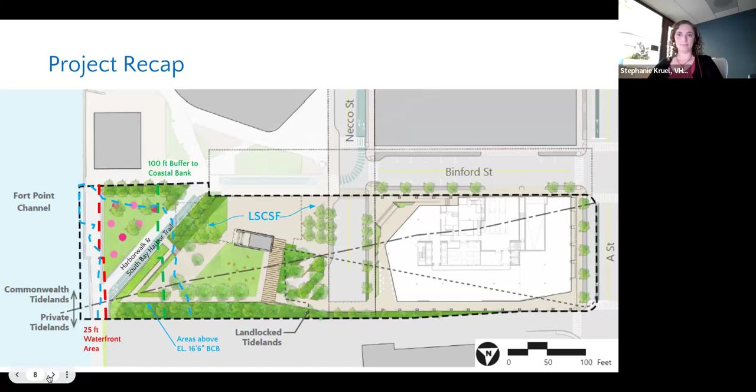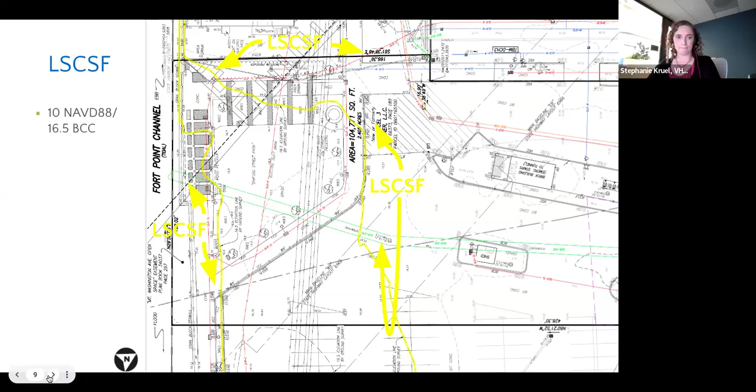Next slide, please. One of the requests from the Commission was an existing conditions site plan that clearly identifies the elevation of 16.5 Boston City Base, 10 NAVD 88, which is the limit of land subject to coastal storm flowage. So in addition to the full-size engineering plan, we also submitted a snippet that focuses more here. You can see the LSCSF is all around. There's a high point on the site. The Fort Point Channel is plan left, and you can see that the area that is not LSCSF is in the middle. Next slide.

The commission asked for a flow path analysis under existing climate conditions. We had provided one under 2070 climate conditions, which was from our MEPA filing, and we also included the submitted DEIR Chapter 7 that has that full analysis. But as far as current conditions go, what we explained in the memo is that FEMA uses a transect-based coastal hydraulic analysis to estimate the elevation of the base flood, but it uses a one-dimensional model of waves that takes a snapshot in time. We use different modeling—the same modeling used for Suffolk Downs. It's a two-dimensional model that calculates flood extent, depth, and velocity as the water moves over the land and then recedes, so it's a dynamic model. According to that model, the site actually isn't currently subject to flooding during the 1% annual chance event.

So when we ran the model to show the impact that our project would have, you'll see two of the same picture, because it actually won't impact flooding of adjacent properties under current conditions.

And also the additional information that we submitted on August 23rd included information about future potential flooding under various build scenarios, with our project being built and the other projects not being built, with some of them being built, etc. So there's some more information in there.

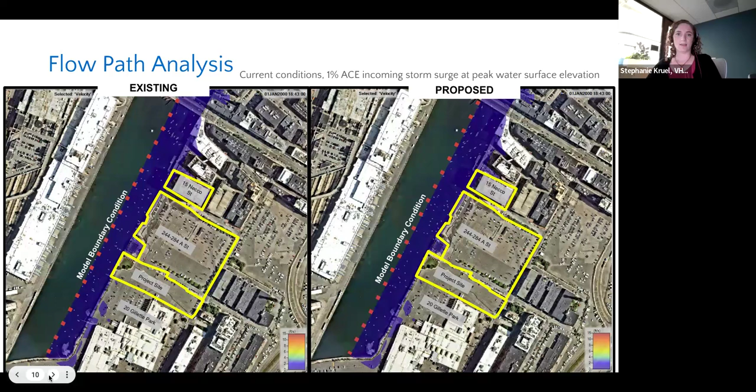There was also a question about the species selected for the landscaping. Two of the 11 tree species in the proposed planting schedule are non-native: honey locust and lacebark elm. These are both included in the Parks Department's list of recommended public street trees, and they were selected for this project to be consistent with the species chosen for the adjacent project, the 244 to 284 A Street project. I know that hasn't been in front of you yet, but we've been coordinating throughout the project with that as well.

As far as other plants, there are 2 perennial species of the 8 selected for understory plants that are non-native: Russian sage and Veronica. They were specifically selected because they attract pollinators, are drought tolerant and salt tolerant, and adaptable. They're part of the cohesive planting palette and have performed well in these conditions. They're only specified for the perennial garden nooks, but if the commission wishes, we'd be happy to substitute those as necessary. I also want to point out that this project is subject to Parks review prior to getting a building permit, so the Parks Department will have another crack at this.

Is there a question? No. Go ahead. No, okay. And then the last question was about the soils.

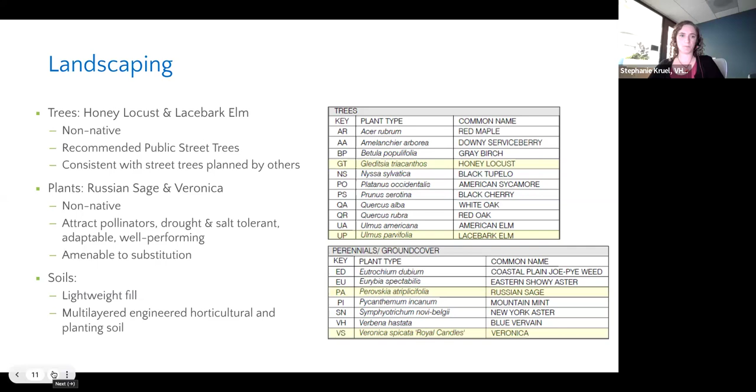Next slide please. There was also a request to clarify where the line of protection is on the plan. So we submitted this grading plan and we've highlighted the line of protection. You can see that at the edges, it will be coordinated with the City of Boston's Resilient Fort Point Channel infrastructure project that you heard about at the last hearing.

The last slide just shows a cross section of the open space portion of the site. You can see that the FEMA floodplain is actually just below the elevation of the existing portion of the Harbor Walk. Then there's another portion of the Harbor Walk that cuts through on the diagonal, elevated to 18.5 feet. The line of protection is a little further up. I think this demonstrates how what's been called a berm is being integrated into the site between the MassDOT tunnel and grade.

And that is the last slide that I have, so I'm happy to answer any questions.

Great, okay, thank you. First issue to get out of the way, the plantings that you were talking about. Maybe we don't have our resident experts from Parks and Commissioner Wilson here this evening, and you say you're going through Parks review again. So maybe what we can do is slip in a line in the conditions that, depending on park review and staff review, being informed by those two commissioners, they may be switched out. Does that make sense? Sure. Are you talking about the understory plantings or the trees, or both? Yeah, understory. Okay, great, yep, okay.

So temporarily, so I don't know, Elena or Dee Dee, if you're able to go backwards in the slides just to that very last slide, the cross section. Right, so you can see the harbor walk is at elevation 18.5 here. So yeah, this would be subject to inundation in the 1% annual chance event in 2070 with 40 inches of sea level rise. And you have to keep in mind that 40 inches of sea level rise on its own has a certain likelihood of occurrence. So there are multiple probabilities here.

But yes, during a storm event, much as today, you might anticipate portions of the harbor walk periodically being inundated during a 1% annual chance event. That would happen here. And so it's going to be designed to be recoverable. That's why the specific plantings were chosen to be salt tolerant and adaptable. But it could periodically for a short time be inundated and then be available for use again when the storm is over. So it's sort of like tide coming in and going out. Well, the flooding will come in and go out, right.

Yeah, it's not a tide, but it is a flood event during a big storm in a case where nobody would be outside anyway. Hopefully. So you really shouldn't be walking around on the waterfront in that type of event, but yes. So the access will still be there, but not all the way up to where we see the water now. Right. Well, can you go back one more slide, Dee Dee or Elena, sorry.

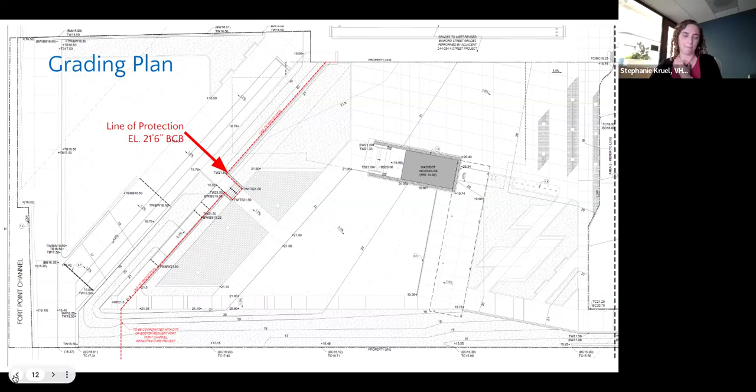Thank you. That's all, check, Walter. Thank you. Commissioner Richmond. Yeah, first of all, I really would like to thank them. This has answered not only my questions, but the last slide, the cross-section, made me understand the berm. So I think that was really very helpful and useful.

And I also just want to make a comment about the selected non-native trees and plants. I don't know as much perhaps as others on the commission, but I am familiar with those 4 that you've chosen, and I think those were very good choices. So I don't have any questions. Thank you for doing this, and particularly thank you for the cross-section slide.

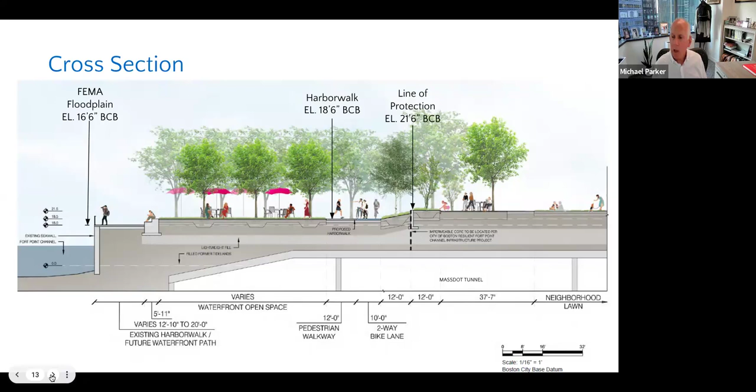Great, thank you. Okay, Elena, I don't see any hands up. Did you get any emails? Nope, I'm not seeing any hands either, and we have not received anything in the inbox. Okay, so with that, I would entertain a motion to close the hearing and issue an order of conditions with a special condition regarding the, I think it was 2 plantings in the understory. And Elena, you know what I was getting at. Pending Parks review, and maybe you could check in with Commissioners Wilson and Linay.

So moved. Sorry, Chair Parker, just wanted to confirm, and my apologies, I had missed a message in the chat. Oh, okay. And I believe they have their hand up now. Let me look at the question. I can't tell what the name is. Did you want to speak, or do you want your comment read?

Patrick. Okay, awesome presentation. I live in the neighborhood and I'm excited for these parking lots to have some development! Seems like the process is taking longer than other neighborhoods. Can it get started soon? It would be really beneficial to the city! Okay. This is the end of our process. As Stephanie pointed out, I think there's other concurrent processes, don't know what the time frame is on that, but you can certainly check with the proponent.

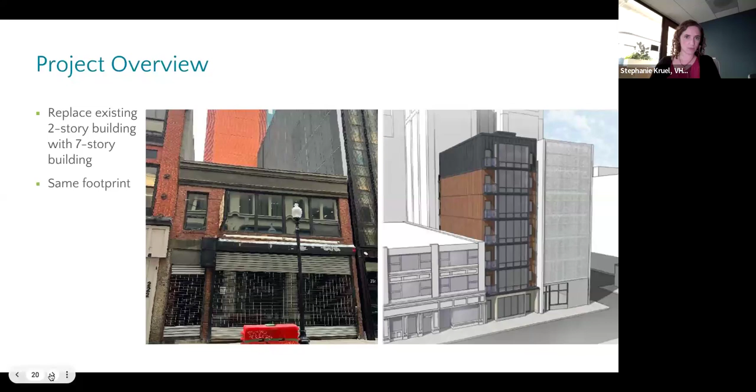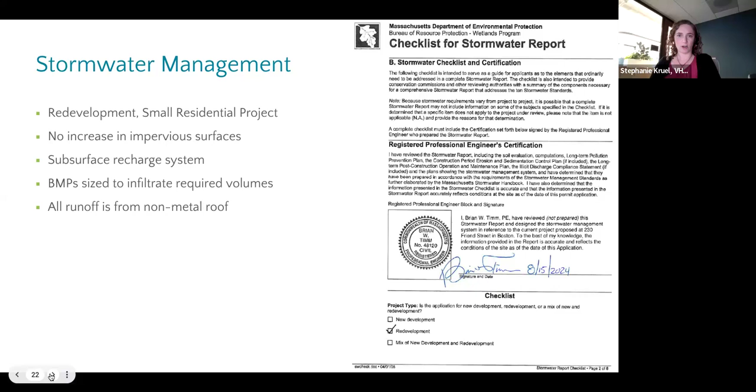The project site is in fact within the GCOD, and the proponent received a letter from Boston Water and Sewer dated July 26, 2023, confirming that the project meets the GCOD requirements. That was also submitted with the NOI. Next slide. Under both current and proposed conditions, the building occupies the entirety of the project site, so it's 100% impervious. The NOI included a stormwater report checklist. It indicates that as a redevelopment, the project meets the Massachusetts stormwater standards to the maximum extent practicable, and it identifies some of the ways that the stormwater standards are met. Next slide.

So the project is within the floodplain according to the currently effective flood insurance rate map. It indicates that the site is within an AO zone, which is different than an AE zone. Here, it just indicates that the flood depth is 1 foot above the grade. So that means that there's a 1% annual chance that there will be flooding at this depth. This equates to a base flood elevation of around 10 NAVD 88, depending on where you take the average elevation of grade in front of the site. And the project site's actually elevated just slightly higher than that at 10.2 feet. So it's just really a matter of inches. Next slide, please.

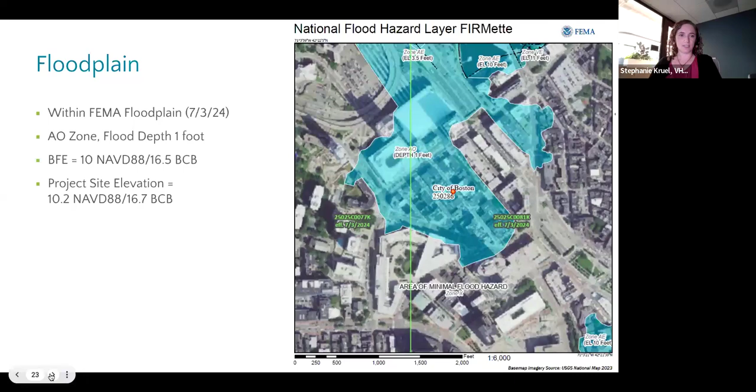And in the last project, we just talked about the differences in modeling. According to the Massachusetts Coast Flood Risk Model, this site is actually not subject to flooding currently, but it will be in 2050, when during the 1% annual chance event it would be subject to about a half a foot of flooding. And then barring the implementation of district scale flood protection measures around the TD Garden and the North End, by 2070 the project site would be subject to flooding during the 1% annual chance flood event up to a depth of about 3 feet. Next slide.

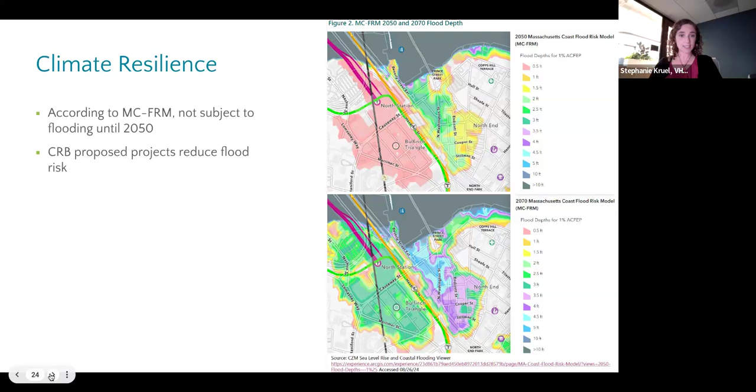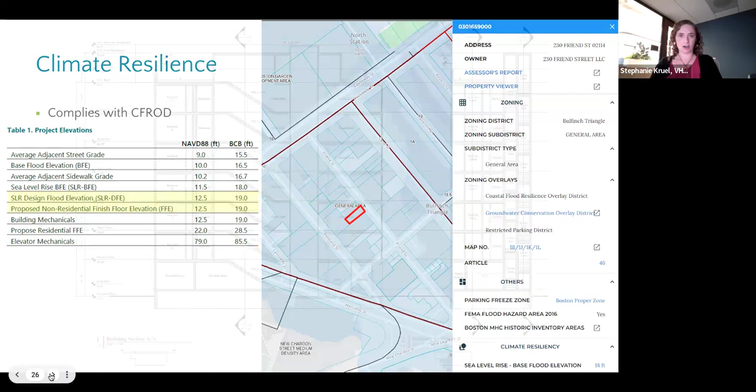And I know that this next slide is really hard to see at this scale, but this was submitted as part of the additional information. This was stamped, and I think this figure was actually submitted with the NOI, but it shows the finished floor elevation of the building's non-residential space at elevation 12.5. The lowest elevation of the residential space is much higher at elevation 22 NAVD 88, or 28.5 Boston City Base. However, there is a portion that is at grade.

So in order to meet the existing exterior grade and provide flush ADA compliant entryways, some of the elements are at the sidewalk level. That's the 10.2 NAVD 88, and that would be the exterior doors on the front facade, the adjacent vestibule, the lobby, and the bottom of the elevator. The lobby stair, the sprinkler room, the electrical room, the egress hallway, an ADA accessible bathroom and retail space are all elevated to the sea level rise design flood elevation of 12.5. And then the elevator machine room is actually located on the roof. Next slide, please.

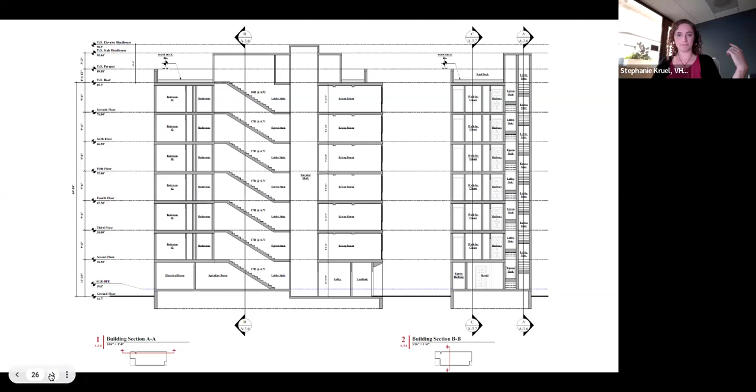So as far as it relates to abutters, the building is going to be in the same footprint that it is today. It won't have any impact on the abutters. It will match the facade of the adjacent buildings. There are no new features being introduced that would change any existing flow path direction or elevation or velocity. And so there will actually be no impact on LSCSF as a result of the project. And that is all I have.

Great, thank you. Okay, so Gray, I think you understand now, if I wasn't clear enough at the last hearing, what we're looking for as far as the elevation. So thank you very much for providing those. The only question I have, Stephanie, is regarding the performance standards for land subject to coastal storm flowage. Generally, when we see redeveloped sites like this, we like to see an improvement regarding infiltration or some greenery, or, you know, a green roof, light colored materials for the roof, is one example we've used in the past.

And I understand that this is a constrained site. We had one in Fort Point Channel not that long ago, asking the same question. And, you know, the comment was, well, this is all the room we have. And that wasn't a satisfactory response. And we came to a solution where we got some greening of the site there.

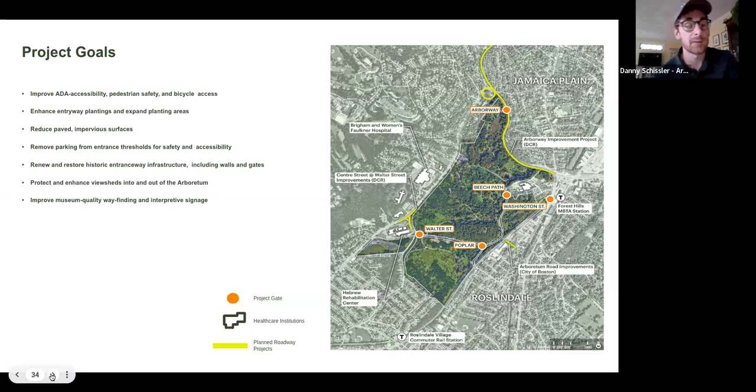So this is just a shot showing the 5 entrances we're looking to renovate. We're basically doing this at a pace of 1 per year. We started with the Poplar Gate entrance, which is currently under renovation. Washington Street is slated for next year, and then Walter Street we would be looking to construct starting in 2026. So we're a little ahead of the ball here, but we wanted to make sure we are going through a robust approval process with the Concom.

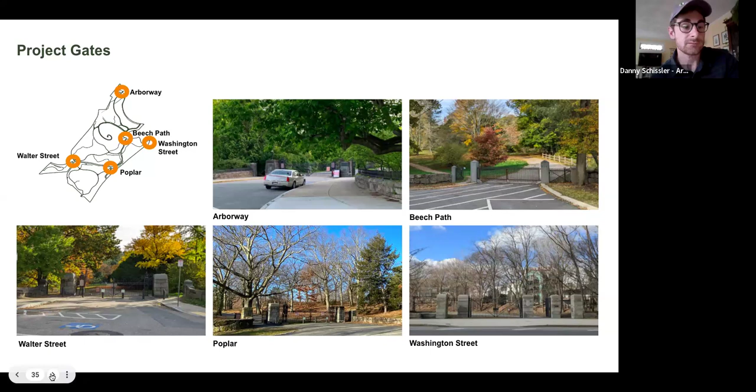It's important to note that with the Walter Street entrance, the one we're seeking approval for tonight, the vast majority of the land here is owned by the Boston Parks Department and is managed by Harvard through our long-term indenture, essentially for 1,000 years. There is a sliver of right-of-way as well, and we have gone through our PIC approval process already. We've also had Boston Parks Department review at several design milestones, and certainly at the permitting level that you're seeing tonight. That's just showing that we're looking at Walter Street tonight.

So just a few other brief tidbits about what we're trying to accomplish. We're really looking back in history towards Frederick Law Olmsted's design of the Arboretum 150 years ago, looking to restore some of the curvature and openness of these carriage gates that are original to the Arboretum. Much of that feeling has been lost. Many of our gates are closed, some of them welded shut, including the Walter Street gate we'll be looking at tonight. We are hoping to essentially reopen those gates to the public for the first time in decades.

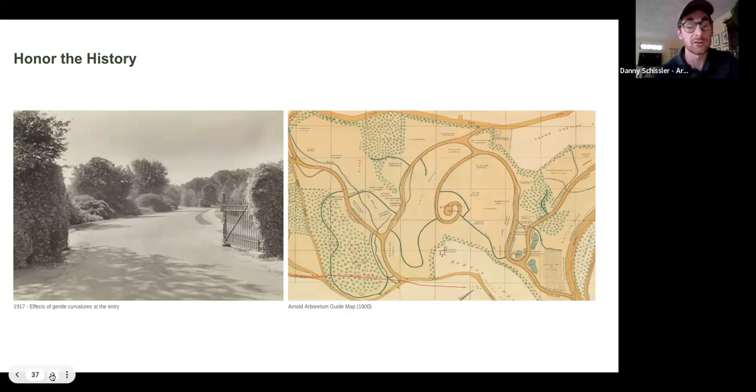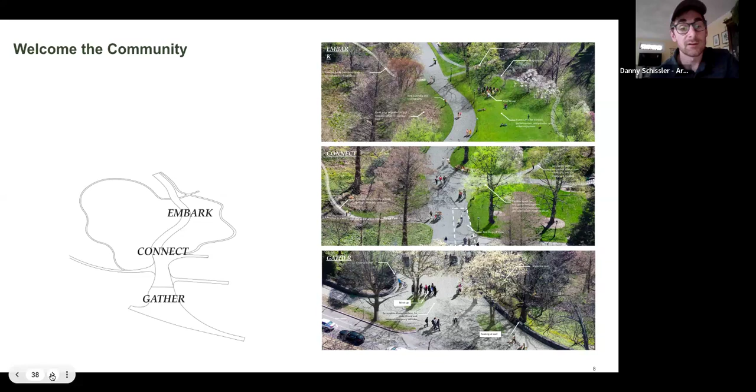So we went through a very robust procurement process that led us to our excellent design team. This is Michael Van Valkenburgh Associates' concept for how to improve these entrances by thinking of them as multifunctional spaces where people can gather at the bottom, arriving from all forms of transportation, can connect with their loved ones and other visitors, and then embark into the landscape to enjoy the Arboretum.

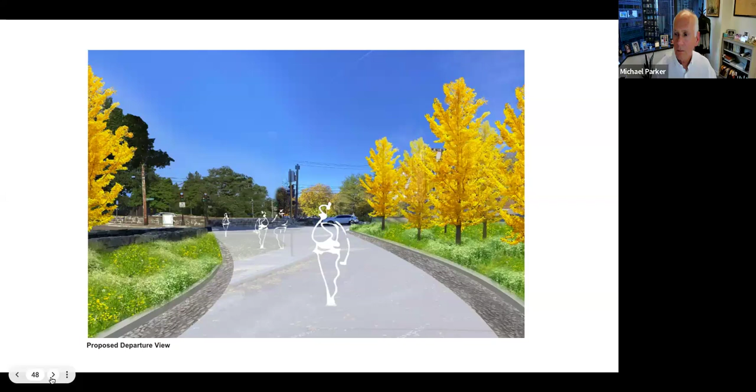Great, thank you. So as Dan described, where we have the Bussey Brook, associated with it we have the 25-foot riverfront area, offset from that the 25-foot waterfront area, and then the 100-foot buffer to brook and bank, which are very much aligned because there is very little actual wetlands to the bank. If we want to go to the next slide.

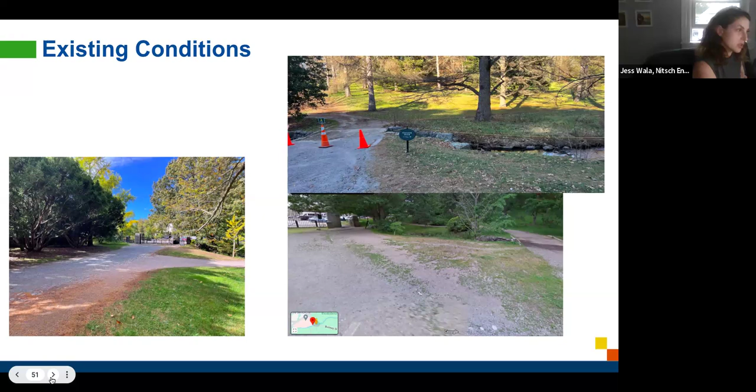We're just rehighlighting what Danny has here, that the existing riverfront and 50-foot waterfront area is largely compacted soils and not really operating. That will be replaced with improved added plantings, added vegetation, and a meadow shrub mix. Next slide shows more examples of what we're looking at, where it's been very degraded along that footpath over time, so the pervious areas are not really operating to their full function.

So here, in the existing conditions, we have all of the existing impervious area and landscape area. We delineated the difference between the pedestrian-only gravel path in the lighter gray, and the darker gray, which is actually the vehicular pavement. In the existing conditions, that vehicular pavement is picked up by a catch basin that goes out to the drain line in Walter Street and then connects to the culvert that outlets to Bussey Brook.

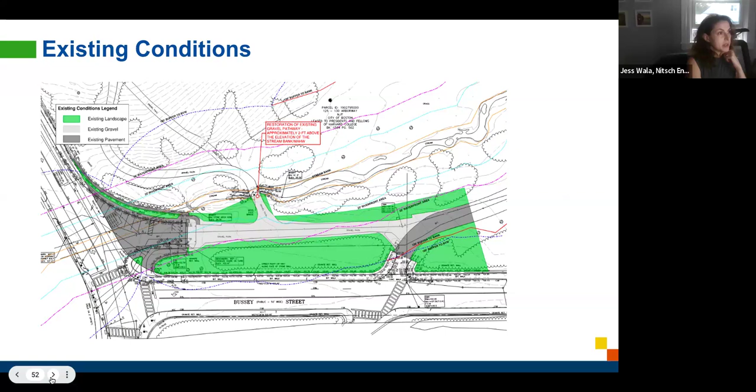Next slide shows the proposed conditions. We're significantly reducing the pavement. All that light gray is the gravel path, compacted gravel, and that gray area, as Danny described, will no longer be vehicular — it'll be pedestrian only, but it will be exposed aggregate concrete. So it will be impervious out by the ginkgo tree grove.

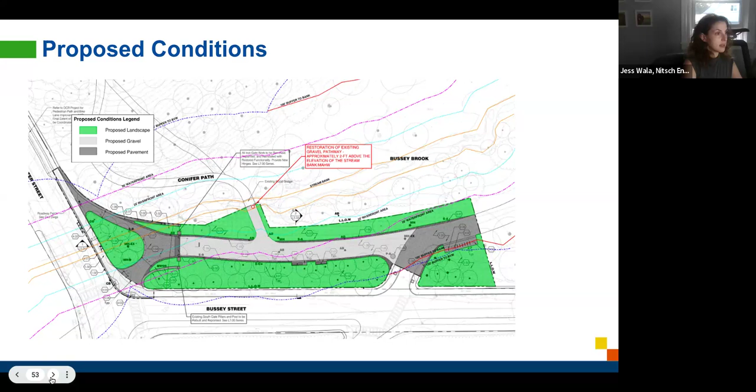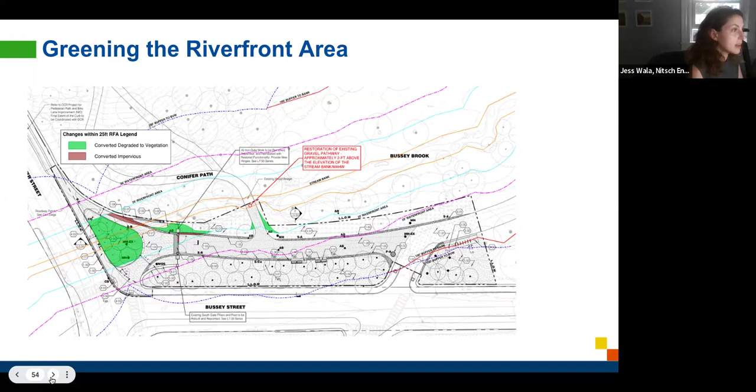Next slide. Here what we're showing is just the area within the 25-foot riverfront area that is previously impervious and is being converted to landscape, shown in green. There's also a small added bit of exposed aggregate concrete and cobble swale in brown that will become impervious. You can see it's a large net decrease in impervious area within the riverfront area.

And this is our utility plan, just to highlight — this is very much an LID practice. We're reducing impervious area, so we don't have any specific subsurface systems, but we are greening the site and improving the actual operation of the vegetated site. Right now what we're looking at is degraded, compacted, exposed soil. We'll be replacing that with shrub, meadow, and additional trees, so that material will actually be able to absorb rainwater. We think it'll improve the function of the brook, slow water, and have more infiltrative capacity and filter it a bit before it enters the brook. Then, west of the entrance, we'll have an area drain that'll collect any runoff and connect it into that existing system that outlets to the Bussey Brook.

Just to touch on utilities — I'm sure Commissioner Sullivan, you may be familiar with this. We've worked closely with BWSC, Phil Rock, and Peter Salvatore on all of the existing sewer and water lines that go through here, so we're in very close coordination with them. I think we're in a good place; it's currently in review with Phil, but we've met with them a number of times, and I think we're all happy with the improvements that BWSC and the Arboretum are doing.

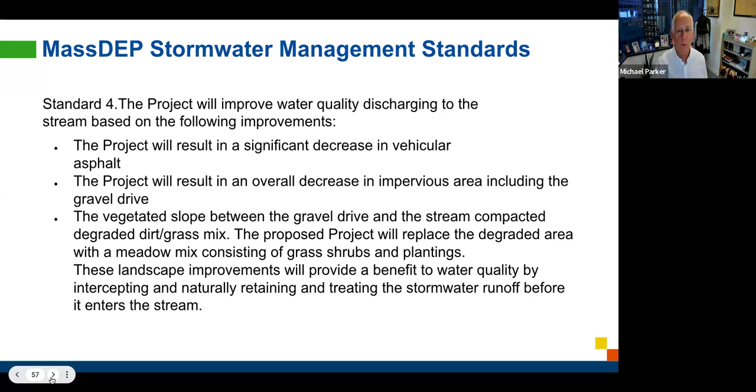That's we're okay, improving the water. Yeah, we saw this, you don't need to go over all that. Okay, next slide then. I think the rest is just the riverfront area, which I'm happy to go into the numbers, but we can just skip through this right now. Yep, same here. And then that's all.

So I'm happy to dig into those riverfront area numbers if we want to, that were in the notice of intent. Don't mind, I didn't mean to. I was just going through the stormwater. Oh, okay, you just go over that riverfront area. That would be great. So two slides back then. There we go, thank you.

So we'll be reducing - we looked at the riverfront area as the whole parcel. So this is a small portion of that parcel, and we're altering about 3.3% of the riverfront area within the parcel, riverfront area to Bussey Brook as it travels through the Arboretum. We're reducing impervious area within that riverfront area by about 2,300 square feet, which is about 1+% of the total riverfront area. But the existing degraded area within the parcel does not exceed 10% - it's about 5%. And so after this project, it'll be 3.8%. Great, okay.

Okay, anything else? That's all I have. Okay, thank you.

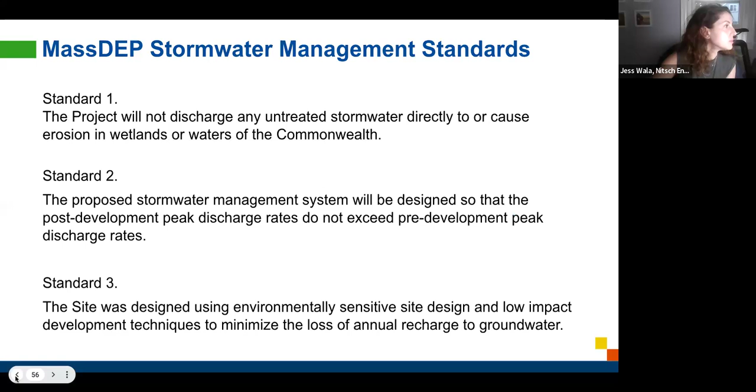I'm sorry, I'm interrupting myself, but Danny, didn't you recently find some documentation that it was actually BWSC owned? Yes, actually, John, I'll flip you the email. On a whim, I asked the DCR if they knew, because they are also going through the Concom process for their Center and Walter intersection renovation. I asked them if they knew who owned the culvert, and they said all signs point to BWSC. So I'm happy to share that with you.

Well, this isn't a Ouija board, we need documentation. I didn't pry any further than that. I know it's not Harvard, I'll tell you that. Well, it wasn't Harvard for the Goldsmith Brook either, but the Parks Department picked it up. I'm just throwing that out there.

Just look at it, it's in good shape, I don't have a problem. We've been able to convince, we've got several brooks, Canterbury Brook crossing into Morton Street, crossing on American Legion Highway. We've determined that that belongs to Public Works Department, it does not belong to us.

So I'm just trying to be open with this thing. We can continue this, worst case is we can pass this. You're not doing the work for 2 years. We need to come in and do an amendment, we can do an amendment just on the culvert. I'm just saying we need to solve this problem once and for all and figure out who owns the thing.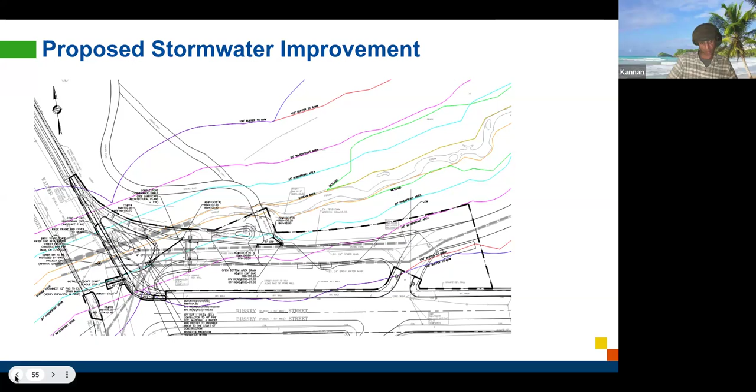Okay, but still within the Arboretum for another time. Hopefully it's another time soon. Yeah. Great. Yeah, thank you. Looking forward to this project. That's all, Chair Parker. Thank you.

Great. Commissioner Richmond? Yeah, I have just one question: why are the construction vehicles from Faulkner parking there? Well, it's open street parking, and if you have more information than I do, please let me know. But I've been dealing with this headache for the last couple of years. I wasn't part of the IMP process for that project, but I suspect that there was never a good parking plan in place for that project, and it's basically spilled out into the surrounding neighborhood, and in fact, all the way down Bussey Street.

So, we've worked with BTD to get signage along Bussey to at least limit the hours people can park, so that there could be some enforcement. I'm putting in 311 requests every week on my phone, telling all my friends and coworkers to do the same. And we're looking forward to a time when the parking will be opened up once again. But I've certainly learned that with these large IMP Article 80 projects, you have to pay very close attention to where people are going to be parking.

Okay, and I'm absolutely in favor of the suggestions that are included in this proposal, and really commend you and your staff and the Arboretum for doing them. But I'm hoping that as they go forward, somebody is paying attention to making sure that as you're beautifying it and bringing it back to what it was, you are also paying attention to all these unwanted vehicles that seem to be parking on your property.

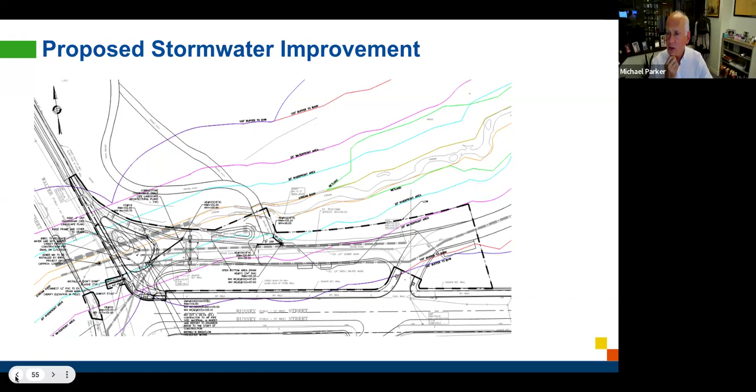And I hope you're successful in getting 311 to respond. Thank you. Great, thank you. Elena, I don't see any hands up. Any emails? I don't see any hands or emails. And Commissioner Sullivan, when I email Danny tomorrow, I can also just include a reminder for the DCR memo to make sure that we have that on file and also get that to you.

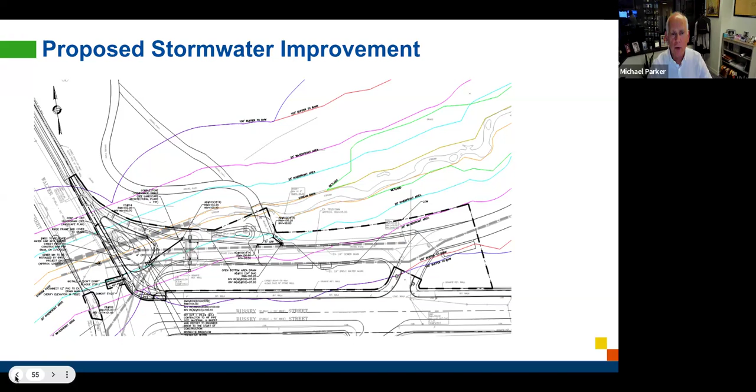Yeah, fine. Great. Okay. So with that, I would entertain a motion to close the hearing and issue the order of conditions with the revisions that we discussed during the hearing. So moved. Do we have a second? Second. Okay, Commissioner Sullivan? Aye. Commissioner Kannan? Aye. Commissioner Richmond? Aye. And I vote aye. Okay, thank you.

That was a great presentation. I now know what needle duff is. And I also know what to call when I abruptly change subjects, thanks to Jess. That's interrupting myself. So. Thank you all so much. Okay. Thank you. Take care.

Okay. Bye. Next item on the agenda is notice of intent for DEP file number unassigned, Boston file number unassigned, from GEI Consultants on behalf of the City of Boston Planning Department for the proposed reconstruction of a timber boardwalk surrounding Dry Dock 2 at Shipyard Park in the Charlestown Navy Yard located at 8th Street, Charlestown, Mass. The resource areas are land subject to coastal storm flowage, coastal bank, 100-foot buffer to coastal bank, 100-foot buffer to land under ocean, and 25-foot waterfront area.

Who's here on behalf of the proponent? Yes, hi. I'm Dolores Fazio from the Capital Construction Team, Real Estate Division, City of Boston Planning Department. And with me is Dan Robbins from GEI Consultants, our design team on the project. Dan? Good afternoon or evening here. Dan Robbins with GEI. Thank you, Commissioner and Commission, for hearing us this evening.

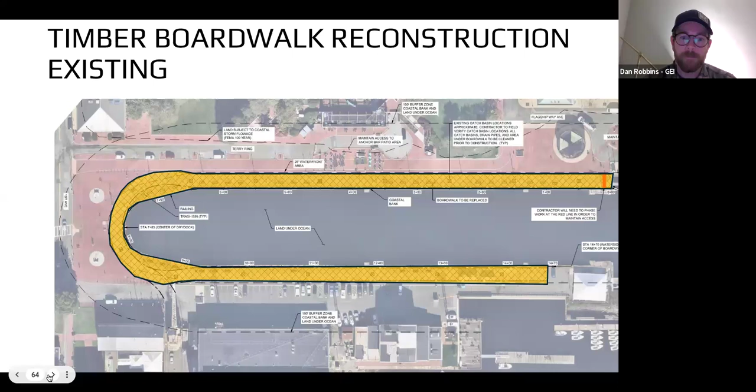So the existing boardwalk sits in between the crane rails, as I had mentioned. It's elevated off of an asphalt floor that extends down into some catch basins. We anticipate that there are about 20 catch basins underneath this timber boardwalk. And currently the material that is used primarily for the decking is an Ipe decking. Here, we're looking to maintain that character with our new project.

You'll see within these slides, as well as the next couple of slides, that adjacent to the crane rail, there is a bit of a gap that becomes a tripping hazard. So we'll be looking to infill that while still maintaining the crane rail at the surface there to help maintain some of the public safety. Next slide.

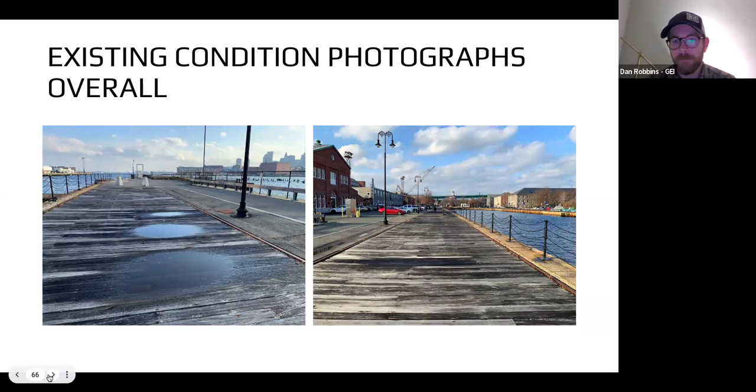So overall conditions, currently, these are a couple of existing condition views. You can see we're seeing some sagging and water ponding within the deck itself. Next slide. There are quite a few areas where there's end rot adjacent to the crane rails. And then there's loose boards. There's been some areas of patching. This was a board that was just loose and we were able to pick right off during one of our inspections here.

Underneath it, you can see that there's a number of stringers and supports, as well as areas of debris that have just accumulated. We'd be looking to clean all of that off down to the asphalt surface through this project as well. Next slide.

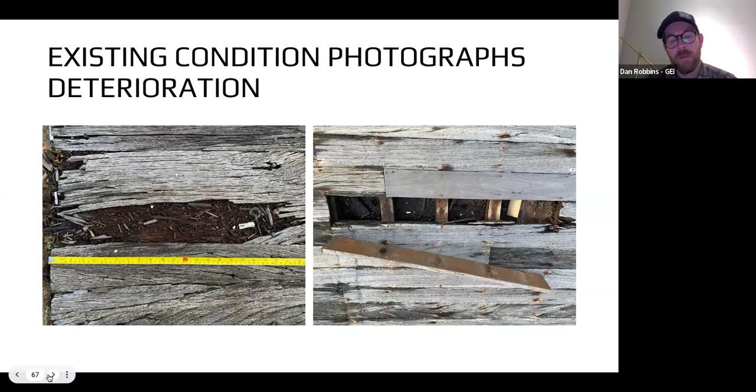This is an area where we've got one of the catch basins. We did a bit of invasive investigation to really identify what we had going on underneath the deck here. So we actually removed this. There are a number of these planks, and these are areas that have a lot of loose planks associated with them from the existing structure. And you can see that they've got catch basins there. Again, we're looking to really clean this up and clean out those catch basins.

The new construction, which I'll get into in a couple of moments, will have an easier way to remove these overhead concrete portions here and place them back in as a panel. So the city will be able to maintain the catch basins more regularly. Next slide.

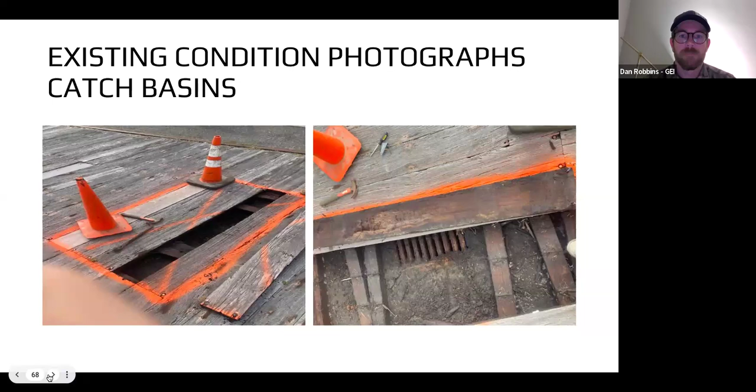We understand that the project area is large and that it also has a significant amount of foot traffic, primarily in the summertime. So we're looking to phase this project into 4 different phases. Within that, we'd start over by Pier 4 and the MBTA ferry, which is going to be broken into 2 phases to maintain access for the ferry throughout the entire construction.

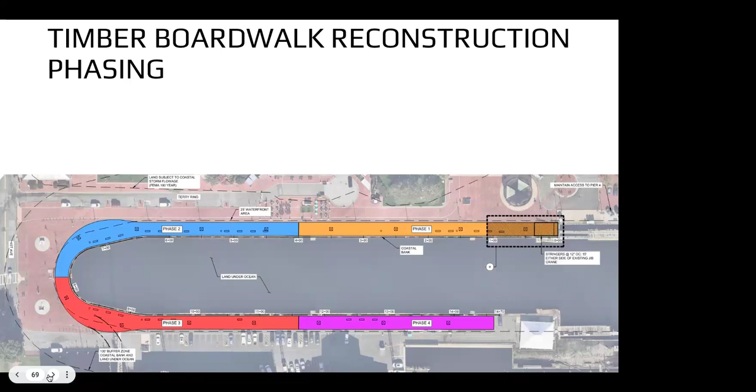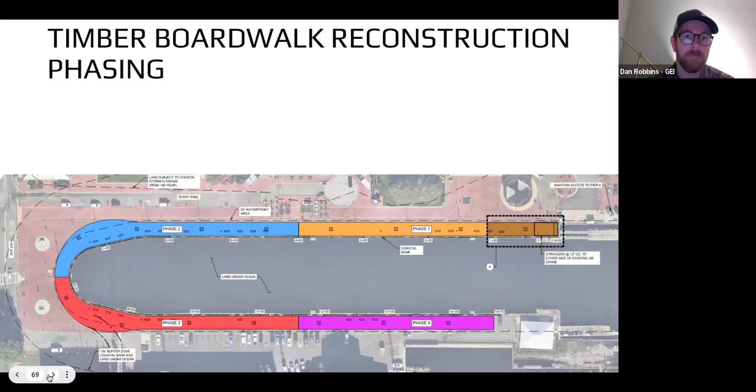Then we move from phase 1 to phase 2, really eliminating an area that has a lot of population during the summertime. Our goal would be to do that work prior to next summer and then move on to phase 3 and phase 4 following that, throughout the spring and summer of 2025. Next slide.

As you can see, the proposed construction is very similar, with the varying elevations of the underdeck here. We're looking to use an unreinforced concrete stringer that runs along underneath the timber boardwalk to help support and accommodate the varying elevations. And then the timber would be connected to a timber nailer that would be Greenheart.

The decking would be all Ipe decking, and then infill adjacent to the crane rails, really eliminating that tripping hazard around the crane rails themselves. For the catch basins, we're looking to have a removable cover, and the removable cover will be able to unbolt and take off that entire panel so you can clean out the catch basins on a more routine basis. Next slide.

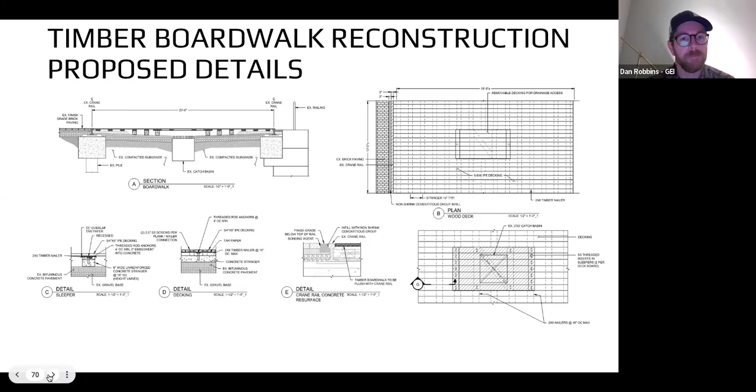Okay, great. Thank you, Dan. Couple quick questions. When you were investigating the subsurface, did you run into any habitat? No, we did not run into any habitat within our subsurface investigations. What I am getting at is the maintenance, emptying of the trash barrels. I think the trash barrels might be compromised, because when you start to do this work, I think you're going to find you have a rodent problem that you're going to need to control.

I do know that in the order of conditions, we have a perpetual maintenance condition, and that would include emptying the trash barrels around the harbor walk there. As far as the wood itself, what are you going to be doing with the wood that you remove? Is it going to be recycled? Where's it going? Yeah, so the wood that's removed has a lot of dry rot associated with it. We anticipate that is likely just going to be sent to a landfill.

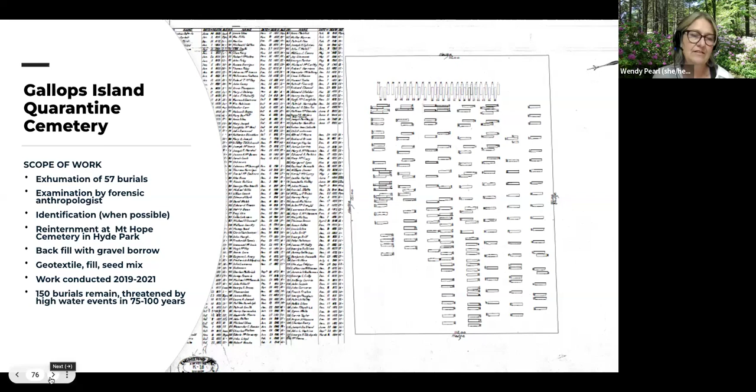If you could advance to the next slide, please. DCR will be asking for an extension because of that planting requirement. But as you'll see in these following slides, the vegetation has actually recovered naturally in a pretty amazing way. So I wanted to take you through time on what the site looked like over the past 5 years or so. Next slide, please.

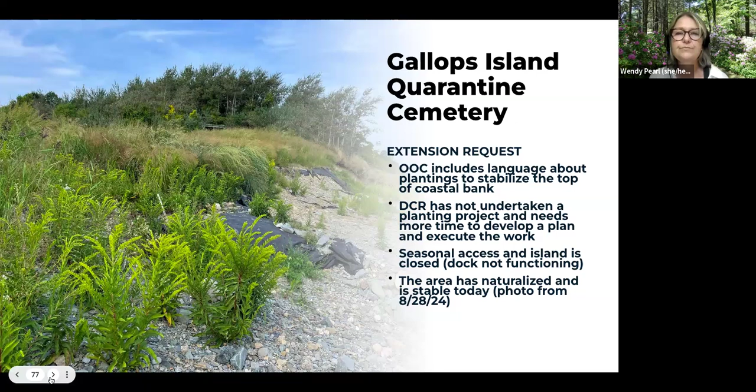These photographs are from last week, and what was really surprising to me is this place has never looked better. The vegetation has really filled in quite nicely. You can still see a lot of wave energy being directed at the lower part of that bank, but the recovery of the vegetation, even just from the simple seed mix put down as a temporary stabilization measure, has been really remarkable.